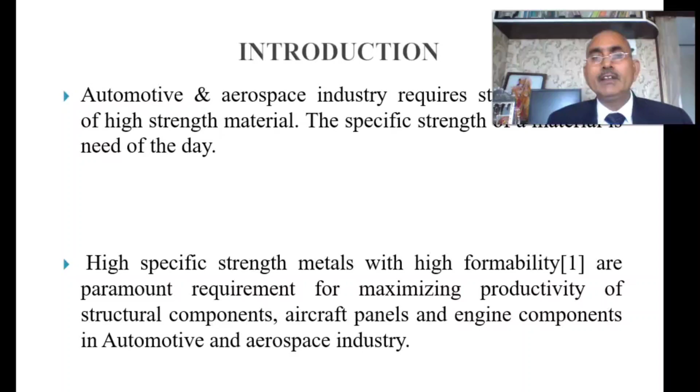Now, we have to develop metal forming technologies by which we can get material converted into a useful product. Now, material we need to process before going to the metal forming techniques. By processing, we can increase its mechanical properties, change its microstructure, grain structure, so that we can further use it for production purposes in metal forming.

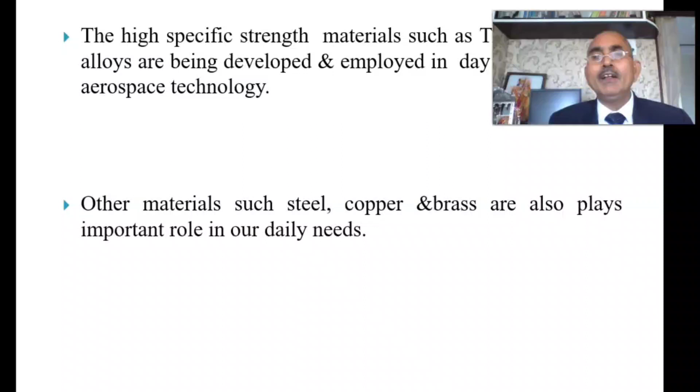High specific strength materials such as titanium alloy are day by day developed by this process by changing their microstructure, and they are used for aerospace technology. Other materials which are used in metal forming like copper and brass, which are more formable, also play an important role day by day in the growth of our nation. Thus, materials have great demand in many fields.

This titanium alloy has its demand also in the medical field because it can be used inside the human body. It is biocompatible. If any bone is to be replaced, generally doctors prefer to put in place of the bone a titanium alloy made bone.

Titanium and other materials are used in automobiles also. In automobiles, we use titanium, less weight, so a lightweight vehicle we can obtain. Thus, a lightweight vehicle will give more mileage. Thus, we can save the fuel cost. There are many forming operations which are used in production, such as blanking, punching, drawing operations.

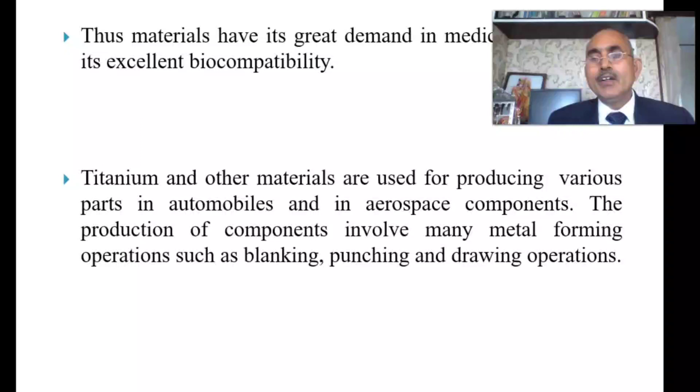What is a blanking operation? Blanking is a shearing operation. Blanking is a shearing process in which punch and die are used. What are used here? Punch and die. What are the equipment used for blanking? Please remember, punch and die. For this, a press is required in which we will fit the die and fit a punch.

Now this punch will descend, and on the die we will keep the sheet metal. When the punch descends, it will come in contact with the sheet metal. It will punch out a portion of the sheet metal, and that punched out portion is called the blank, and the process is called blanking. In other words, blanking is a process of removing the blank from the sheet metal with the help of die and punch, and this blank is the product.

If the removed portion of the sheet metal, or punched out portion of the sheet metal, is used, then the process is called blanking. Now, these blanks are very much useful. These blanks are used for formability testing to make samples, test pieces. These blanks can be used anywhere.

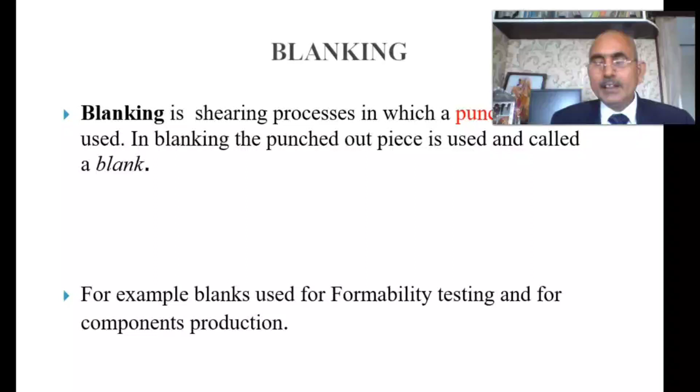These blanks are also used to blank the exhaust pipe of the aircraft whenever the aircraft goes for maintenance for a longer time, so nothing should enter inside the aero engine through the exhaust pipe. There are many applications of the blanks.

Another process is called the piercing process. The piercing process's other name is the punching process. What is a piercing process? The piercing process is also a shearing process in which punch and die are used. What are the equipment? Again, punch and die. Thus, the equipment used in blanking and punching are the same.

Tooling is the same, punch and die. In this process also, we put a sheet metal on the die, and the punch will come in contact with the sheet metal. It will again punch out a piece of the sheet metal, but this punched-out sheet metal piece will be thrown out.

What is useful here? The useful part is the sheet metal which I kept over the die. And this sheet metal with the holes is used as a product. Thus, piercing operation is a shearing operation where a die and punch are used. The sheet metal is kept over the die, the punch descends, and some portion of the sheet metal is removed.

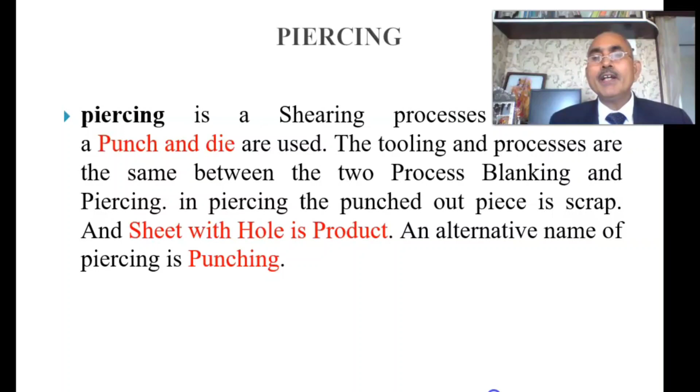The punched-out portion is thrown away as scrap, and the sheet metal with the hole is the product. Remember here, what is the product? Sheet metal with the hole is the product. Then it is called piercing operation or punching operation. This is very much clear from this figure.

And then the punch will come with high pressure, and it will go inside the sheet metal, and a round portion of the sheet metal will be cut. This round portion will be ejected out when the punch goes up, and this ejected, cut out, punched out portion removed from the sheet metal is called the blank, and the process is called blanking.

Other process, piercing. Same way, sheet metal is kept over the die, and then the punch will come. The punch is coming in contact with the sheet metal. Again a piece is removed. This punched-out piece will be thrown out. The leftover piece of the sheet metal with a hole is called the product, and the process is known as piercing process.

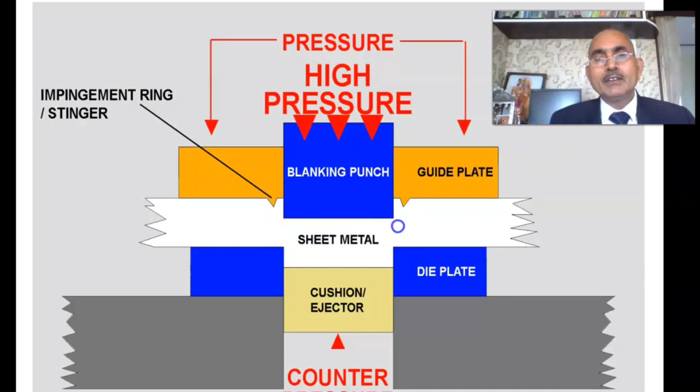This process is useful in the production of items like a cylinder head gasket, which is a metallic gasket we make. Suppose there are 6 cylinders in the engine, then 6 holes will be there. So this process is also very much used in many operations. This is also very much clear by this figure.

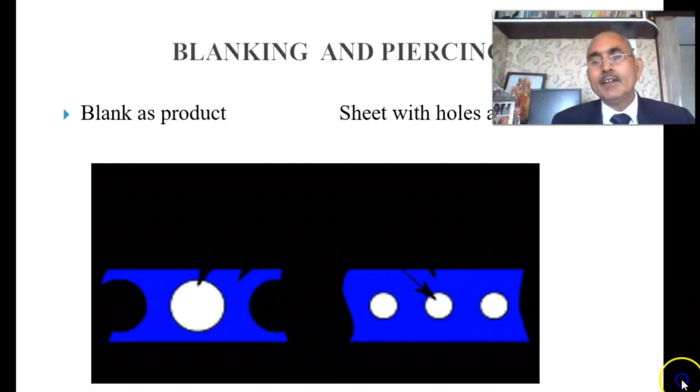The piercing process and blanking process are very much useful. Many products are made by these operations. Next class, we'll discuss the clearance between die and punch.